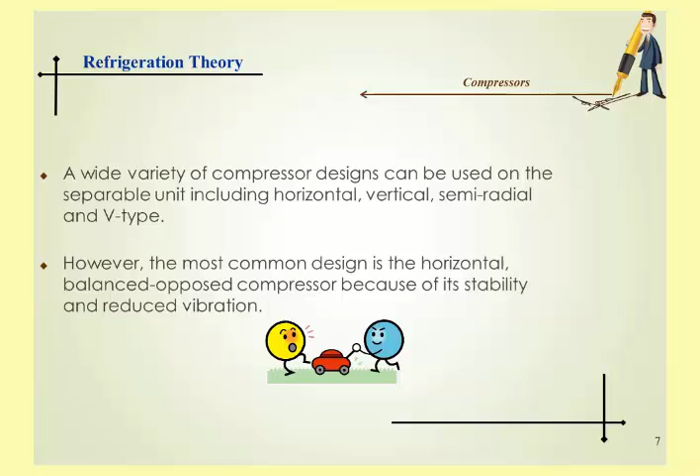A reciprocating compressor compresses refrigerant vapor in a cylinder using a piston. In a way, reciprocating compressors are like automobile engines. The pistons are directly driven through a wrist pin and connecting rod from a crankshaft. Depending on their size, reciprocating compressors may have one or more cylinders, which may be arranged in line, opposed, or in a V.

In each cylinder, reciprocating compressors have both a suction valve and a discharge valve. These valves give the compressor its ability to pump refrigerant vapor against a pressure difference. They are usually located in the head of the cylinder, in passages connected to the high or low pressure side of the system. Let's follow the compression process in a single-cylinder reciprocating compressor during one complete revolution of the crankshaft.

Starting with the piston at the top of its stroke, or at top dead center, the piston begins to move downward as the crankshaft rotates. Because both valves are closed, the downward moving piston reduces the pressure in the cylinder. As the pressure in the cylinder falls below the low side pressure in the suction line, the pressure difference opens the suction valve, letting refrigerant vapor flow into the cylinder.

The piston continues down and pulls in more vapor until the cylinder is filled with low-pressure vapor at the bottom of its stroke. Once past bottom dead center, the piston begins its upward stroke. The suction valve closes. As the piston moves up, it reduces the volume of the space in the cylinder, increasing the pressure of the vapor.

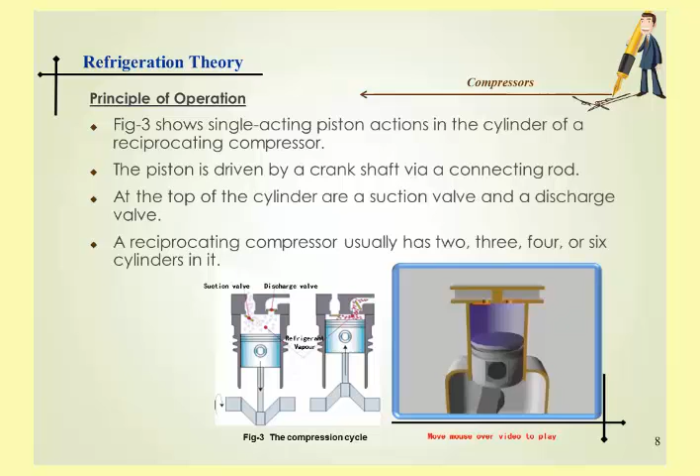The complete cycle then repeats during each revolution of the crankshaft. This is the mechanical positive displacement vapor compression cycle using a reciprocating compressor.

The work expended in compression is transformed into heat. It is possible to remove only a small portion of this heat, and as a result, the temperature of the gas rises during compression. This increase in temperature causes various parts of the cylinder to heat up to an average value that lies between the temperatures at the beginning and end of compression.

In each cycle, there is an area of the cylinder that is not swept by the piston. A volume of gas remains in this area at the end of each compression stroke. This volume is called the cylinder clearance. The cylinder clearance consists of the volume between the cylinder head and the piston at the end of the stroke, the volume between the cylinder walls and the valves, and the volume due to the difference between the diameter of the piston and the diameter of the cylinder.

Due to cylinder clearance, a certain amount of gas remains trapped within the cylinder at the end of the compression stroke. This gas is under discharge pressure and temperature. The subsequent suction phase can only begin when this remaining gas has re-expanded to pressure P sub A. The suction valve will not open until this pressure is reached. This causes a reduction in inlet volume. Compression occurs only in the forward stroke.